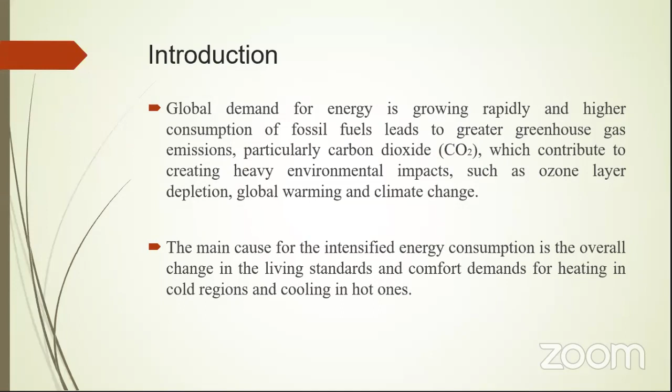The main cause for the intensified energy consumption is the overall change in living standards. That is the main problem. Normally in summer days, or when we are in a hot place, we need some cooling. And when we are in cold regions, we need some heating. That is the reason why we require more energy, why the demand is growing higher - because of living standards, because our body is tuned to a new environment. So that is the problem for heating in cold regions and cooling in hot ones, and this is why the demand is increasing day by day.

If you take how the energy is distributed through different sectors - total energy consumed only from these fossil fuels - how we are distributing to different areas: maximum energy is distributed to industrial sites, transport, and domestic purposes. If we try to incorporate renewable energy sources in industry and transport, almost the maximum amount of greenhouse emission gases will be reduced. This is a small example I'm checking, and this is by 2018.

If you look at coal, it's 38%. We are depending on coal 38% for energy, and natural gas 23%. If you look at renewable energy sources, that will be very, very less - 16 plus 2 plus 5 plus 3, that's it, around 21, 24, 26%.

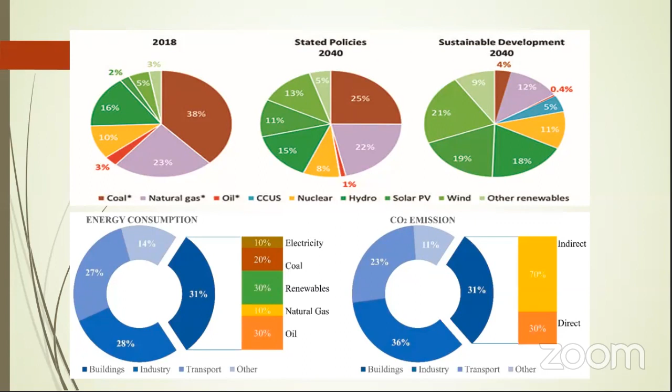For renewable energy sources, we have to reduce the greenhouse emission gases. So what are the things we can do? That is what we are going to discuss today. For that, one thing is we can store

latent heat. So thermal energy storage is a useful tool for improving energy efficiency and increasing energy savings. So how to increase the energy savings and how to improve the energy efficiency, that is the main tool, and that is what we are going to discuss today.

What is thermal energy storage? Here we have 3 different kinds of thermal energy storage. First is chemical heat. This chemical heat works by breaking and forming molecular bonds.

The second one is sensible heat. This is by heating or cooling a material, without any phase changing, just heating and cooling directly. That is sensible heat. And the third one is latent heat thermal energy storage.

That is by different phases: melting, solidifying, those kind of phases. So by melting and solidifying a material. So how are we going to achieve this thermal energy storage?

By using these 3. Now out of these 3, we are going to concentrate only on latent heat thermal energy storage. And why do we need this?

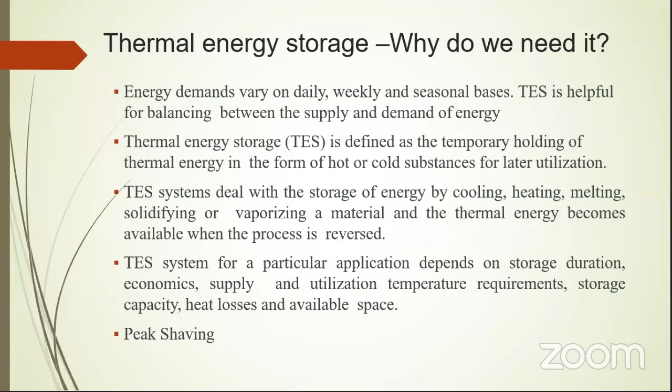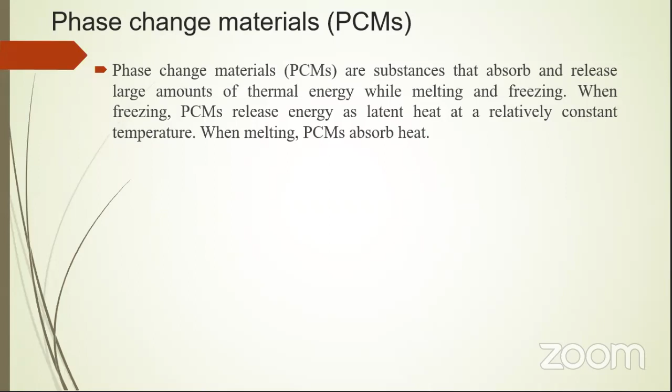That phase change material, when it melts, is in the liquid state, meaning it stores some amount of energy. When the power is not there, it releases the energy to the refrigerator to keep it cool for the next few hours. That means the liquid or gel inside the box, that PCM, will get solid again.

During latent heat absorption or latent heat release, the temperature of PCM remains constant. There is no change in the PCM materials - that is the main advantage. During latent heat absorption or release, whenever it absorbs or releases energy, the entire PCM material for the whole period will be at constant temperature. There is no increase in temperature.

This figure shows latent heat of fusion or latent heat of vaporization. The x-axis is heat supplied, and the y-axis is temperature. When the phase changes from solid to liquid, that is latent heat fusion. The temperature remains constant when it turns from solid to liquid - that horizontal line shows the temperature is constant, with no increase in temperature.

Again, when the phase changes from liquid to gas, that is latent heat vaporization. For that amount, the temperature remains constant as liquid turns to gas. So these two portions maintain constant temperature - these are called latent heat. Solid to liquid means latent heat fusion, and liquid to gas means latent heat vaporization.

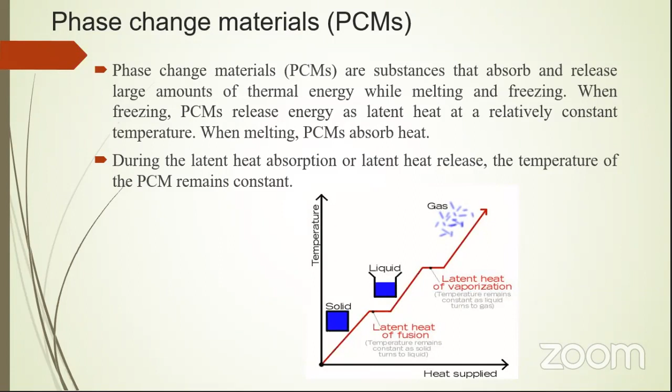Again, when the temperature falls, the core becomes solid again. The PCM solidifies and heat energy is released back to the environment. So initially the energy is stored when the phase changes from solid to liquid, and the energy is released when the phase changes from liquid to solid. This is the concept of phase change materials.

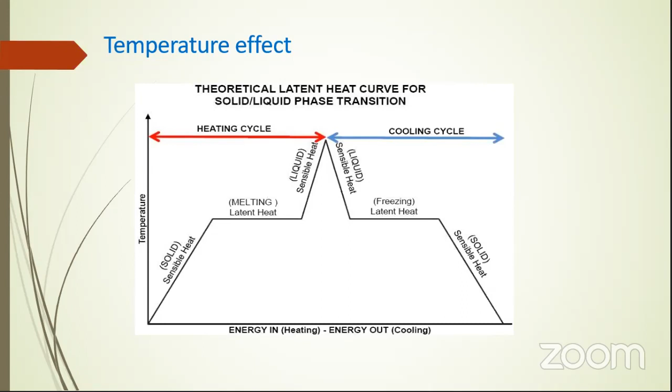Now, how was PCM developed, when was it developed, and why did they develop it? During the 1970s to 80s, NASA space research included considerable research and development of new materials because they could protect delicate instruments in space. That was the main reason they developed PCM - the need arose from the temperature extremes encountered.

In 1987, Triangle R&D demonstrated the feasibility of incorporating PCMs within textile fibers, and that got patented in 1994. They started the process in 1987 and patented it in 1994. The PCM microcapsules within a fiber cover a broad range of fibers, including polyesters, nylon, acrylics, and modacrylics.

In the mid-1980s, work on temperature-adaptable fabrics was undertaken at the US Department of Agriculture, Southern Regional Research Center in New Orleans. So this is the starting of PCM. When it developed, what is the reason, what's the demand? Actually NASA required to safeguard their precision, accurate equipment. For that, they developed this PCM, phase change materials. This is a small example of why we need phase change materials and what the reasons are.

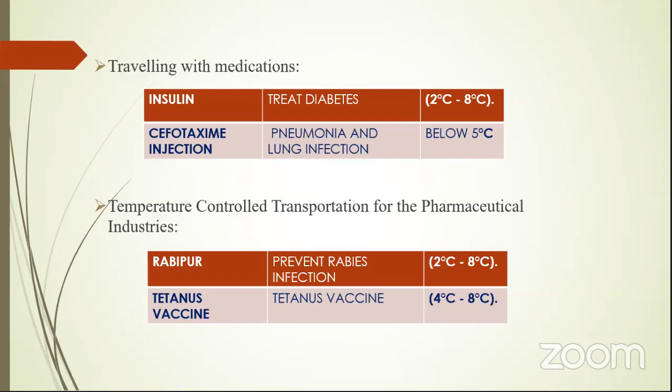These are a few more examples where we use phase change materials. Transportation of blood samples from one place to another requires the proper temperature for the blood, otherwise it will get thicker. We have to keep a constant temperature so the blood remains in the same state; otherwise the phase of the blood changes and then it becomes useless.

Then temperature control for transport in the food and beverage industry, and mini cold storage units for ambulances. Ambulances mostly use phase change materials to keep the ambulance temperature for cold storage, as they have to keep medicines at normal temperature.

And storing of breast milk and feeding infants with utmost care during traveling is also a main important thing - while traveling we have to take care of children too. These are a few places where we use these PCM materials.

What are the properties of PCM materials? On what basis do we select them, and what are the different properties? These properties will change based on the PCM material. Melting point should be in the desired temperature range - that is the main point. So we have to take the melting temperature into account; then only the constant temperature will remain.

High latent heat of fusion per unit volume is needed to store more energy in a given volume - we have to take care of that. High thermal conductivity is also an important property of PCM, determining how much it assists charging and discharging of energy. Also low change in volume during phase change, low vapor pressure to avoid containment problems, and it should be non-flammable, non-toxic, and chemically stable.

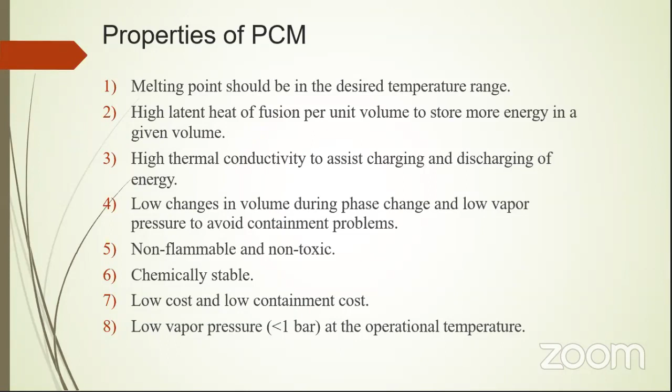Apart from all that, we have to depend on cost, because cost is also a main problem - so low cost, low containment cost, and low vapor pressure at operation. These are the few properties of PCM we have to keep in mind.

We can divide the entire PCM like this: organic, inorganic, and eutectic. Organic includes paraffin compounds and non-paraffin compounds, and inorganic includes salt hydrates and metallics. The eutectic is a phase change combination: organic-organic, inorganic-inorganic, and inorganic-to-organic.

Small examples: inorganic salt hydrates maintain 5 degrees Celsius to 80 degrees Celsius, with high latent heat storage capacity but they fail to recrystallize. Paraffins have high thermal conductivity with small change in volume while melting, and maintain minus 8 degrees Celsius to 40 degrees Celsius; they overcome supercooling and have chemical stability over a number of cycles, but have varying cost and are hazardous to skin.

And bio-PCM is now used in a number of places, maintaining between minus 40 degrees Celsius to 151 degrees Celsius, derived from animal fats and plants.

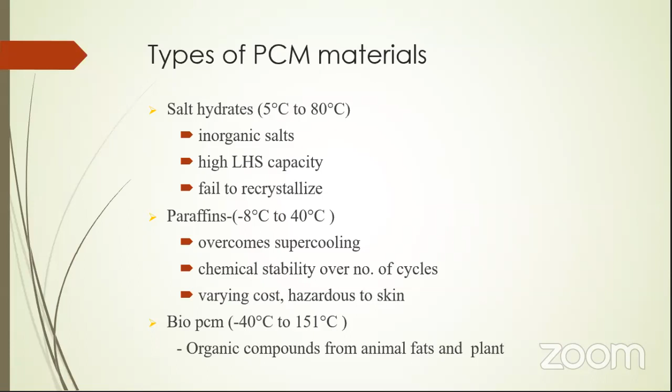And we'll see about organic materials. These possess the ability to absorb and release large quantities of latent heat. That's the main advantage of organic materials. It absorbs and releases large quantity of latent heat during phase change process over a certain temperature, that is at constant temperature. These would be naturally existing petroleum byproducts: naphtha, gasoline, fuel oil, bitumen, and hexane. They have their unique phase change temperature, ranging between minus 70 degrees Celsius to 250 degrees Celsius.

This phase transition: solid to liquid and solid to solid phase transition. In solid to solid phase transition, we have some crystalline changes, one crystalline state to another crystalline state. There will be a small amount of latent heat. When there is a phase change between solid to liquid, that shows large amount of heat with a small volume change, because we have to take care of how much amount of volume changes. If you take larger heat quantity storing with a small volume change, that will be better. If the volume changes too much, again there will be a problem.

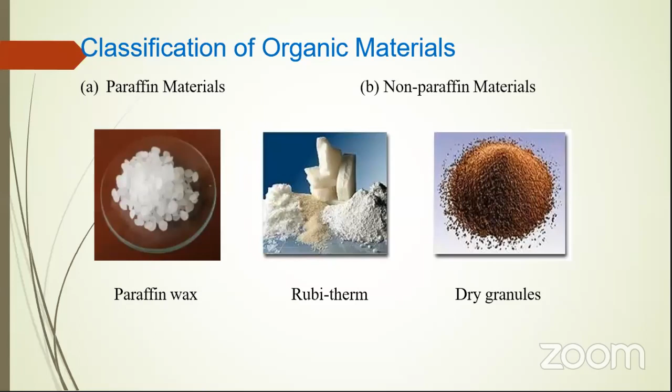These are the classification of organic materials: paraffin materials and non-paraffin materials, and paraffin wax, rubitherm, and dry granules. About paraffin materials, it consists of a mixture of mostly straight chain N alkanes, and the crystallization of the CH3 chain releases a large amount of latent heat. However, under cost consideration, only technical grade paraffin may be used in latent heat storage systems. So only these are the standards we are using: 6106, 5838, 6035, 6499. These are the grades we are using.

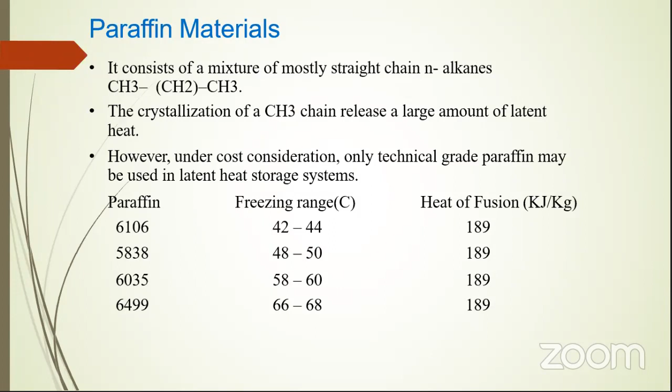These paraffinous PCM materials have phase change temperature below 15 degrees Celsius and are used in cooling cycles. So when we use it in cooling cycle, the temperature is below 15 degrees Celsius. On the other side, the temperature rises to 90 degrees Celsius. So PCM in between 15 degrees Celsius to 90 degrees Celsius is used in heating cycles.

Apart from that, paraffin is very safe and we can rely on it, and it is non-corrosive and less expensive, because cost is the main criteria for selecting the PCM, though other things are also important. So apart from that, cost also we have to take care of. If you compare, paraffin gives all the properties at less cost, so almost we are dependent on paraffin for PCM materials in a number of applications. It has low thermal conductivity, is not compatible with plastic containers, and is flammable. These three effects can be partially eliminated by modifying the wax and storage systems, so we can eliminate these undesirable properties. By eliminating these three properties, paraffin is an entirely good PCM material.

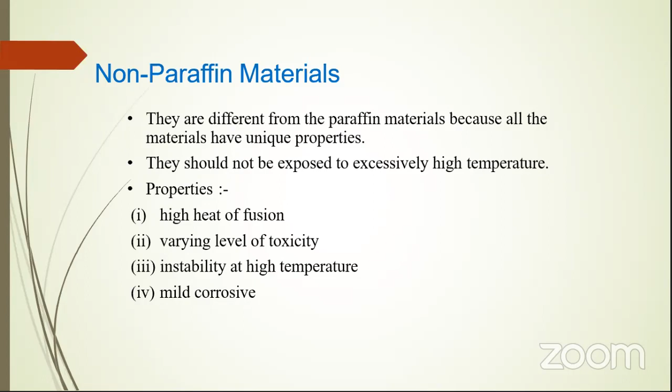On non-paraffin materials, each and every non-paraffin material has unique properties, and they should not be exposed to excessively high temperatures. These are the few properties of non-paraffin materials: high heat of fusion, varying level of toxicity, instability at high temperature, and mild corrosiveness.

Then eutectics, which we have studied in a phase change iron carbon diagram. These are combinations of two or more compounds with a minimum melting temperature. This eutectic almost melts and freezes without phase separation, so that is the problem here - without phase separation, it almost melts and freezes. These eutectics tend to be a solution of salts in water that have a phase change below 0 degrees Celsius.

On what basis do we select? Already we discussed what are the properties, and these are the things we have to take care of while selecting PCM materials. So again a number of things are repeating: melting temperature, heat capacities, thermal stability, mechanical stability, cyclic property degradation, heat transfer characteristics, cost, corrosiveness, ozone depletion potential, fire hazard, ease of encapsulation. That is the main one - ease of encapsulation. That also we have to take care of while selecting the PCM materials, based on what application we are using, where, which place, what location we are using. These things we have to take care of.

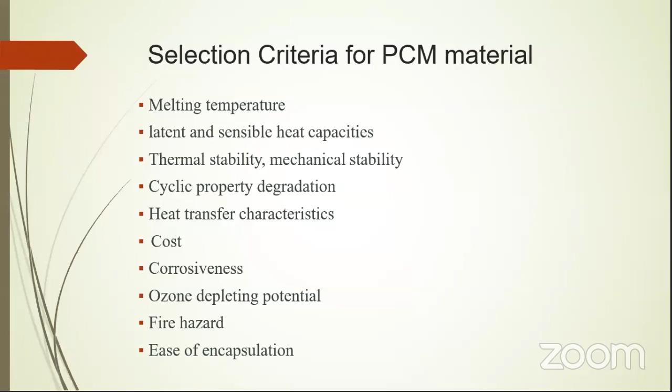And solar water heater, as you know, and cold storage and sportswear. Cold storage like normal flasks, how that's maintaining the temperature - for that we are using PCM materials. So that we are going to discuss today.

And sportswear, why we are doing sportswear means that has to manage the temperature, right? Whatever heat generated from the body and the heat released to the environment, that should be balanced, otherwise too much tiredness will get. The thermal stress will be reduced by using this PCM sportswear. That is the main reason why they are wearing like this, to balance the heat generated by the body and the environment.

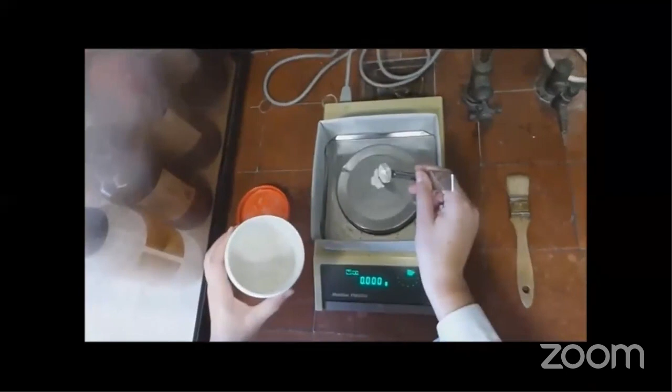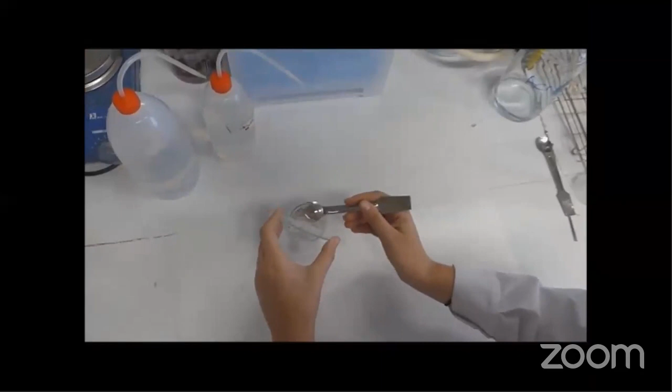And here we are going to take 2 different materials: sodium alginate solution - it'll take only 2 minutes, not more than that - and calcium chloride. This is the sodium alginate. That means how they are making phase change materials by adding 2 different materials. Because this also you should know, right?

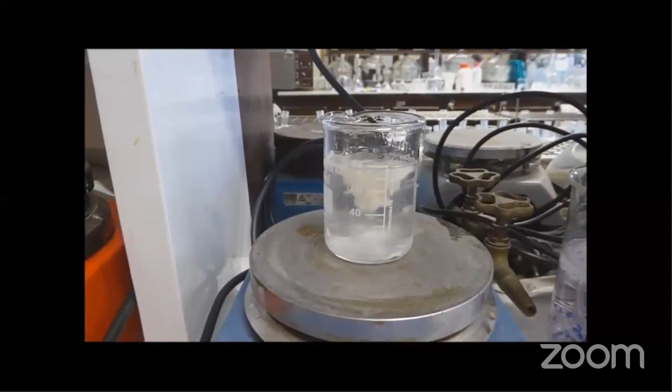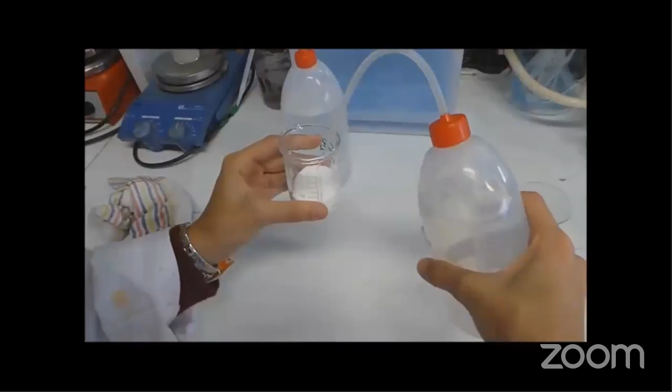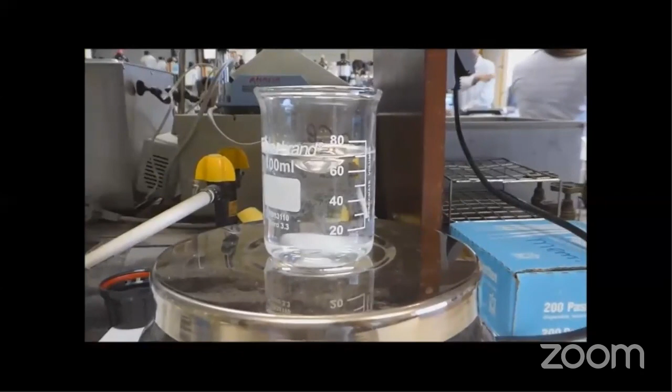And calcium chloride solution - so these are the 2 different solutions we have, sodium alginate and calcium chloride. By mixing these 2, the output, the final solution will be calcium alginate. So this calcium alginate will be mainly for wound dressing. So when we get some wounds for dressing, those places we are using this calcium alginate. Apart from this, this particular solution is used for entrapment of enzymes and forming artificial seeds in plant tissue culture.

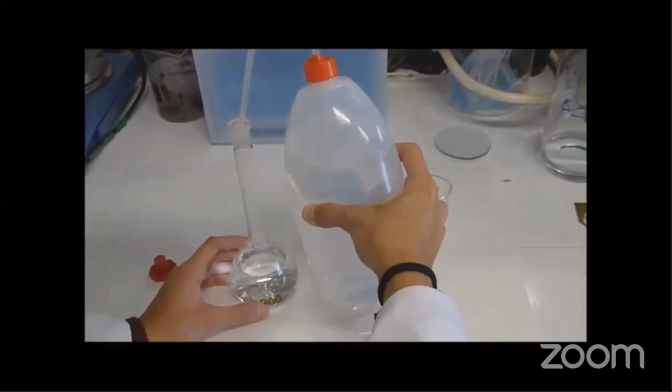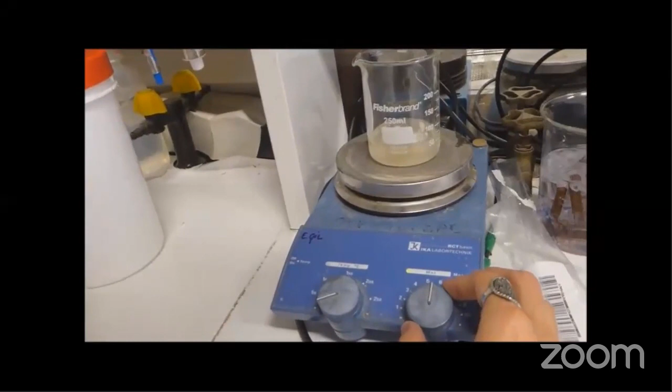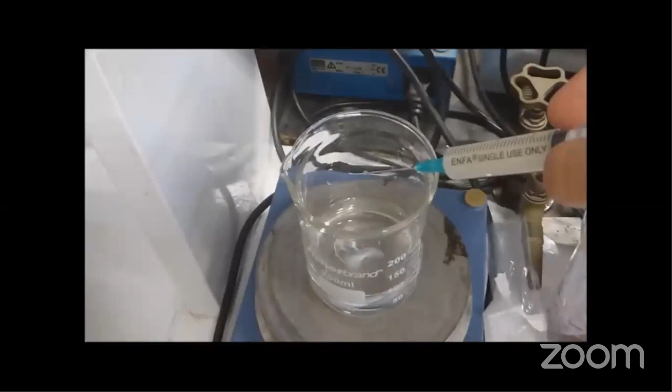So how they are preparing microcapsules? Because as a PCM material, we have to make some capsules or balls like things. Then only we can put those capsules or balls in the PCM material application, wherever it is, either flask or whatever. Here we can have 2 categories: whether we can keep sodium alginate constant and add calcium chloride, or in the calcium chloride we can add sodium alginate in smaller amounts. It will be small - if you look at the video, small balls are making by adding these things.

How we are making phase change materials.

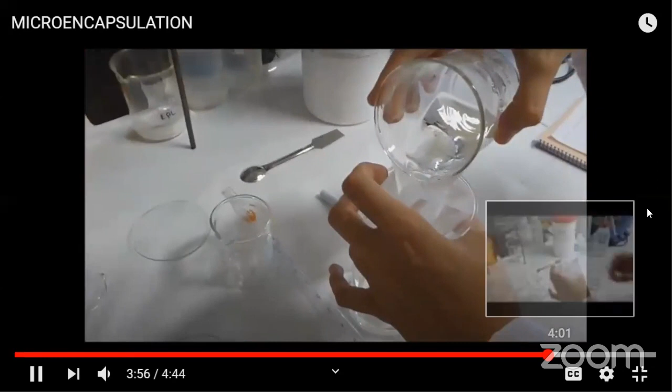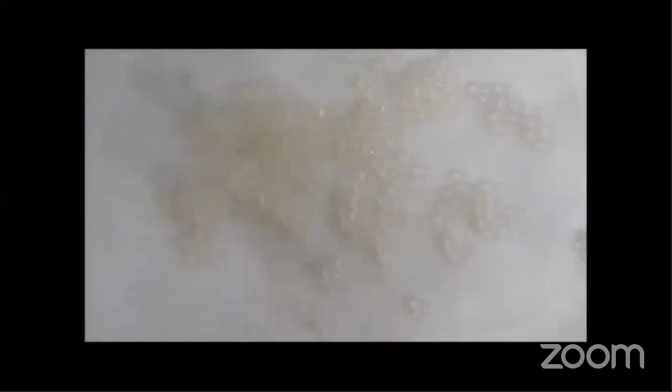So finally, we have got phase change materials in the form of balls, small amount. So these are the phase change materials. This phase change material we can use for any kind of applications where we need some constant temperature - energy store and energy release process.

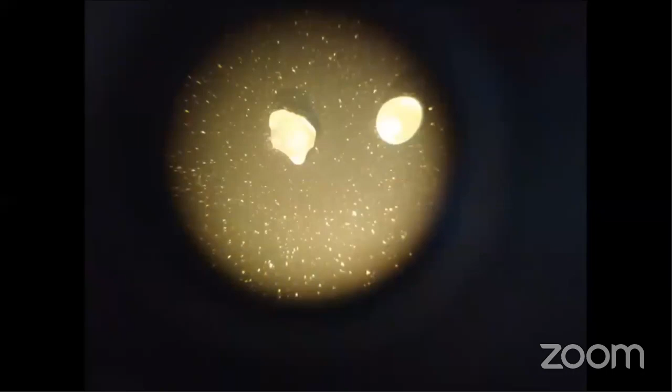So I'll stop this. So this is the video how we are making it. So this is the PCM encapsulation morphology, how we can make the PCM.

And this is, we can keep calcium chloride stationary and move sodium alginate, or we can keep sodium alginate stationary and move calcium chloride. So there is a small change - high irregular gel shape, less irregular gel shape. Anyway, we'll get only calcium alginate gel, that is the final result. There will be some irregular shape based on these two different phases, process.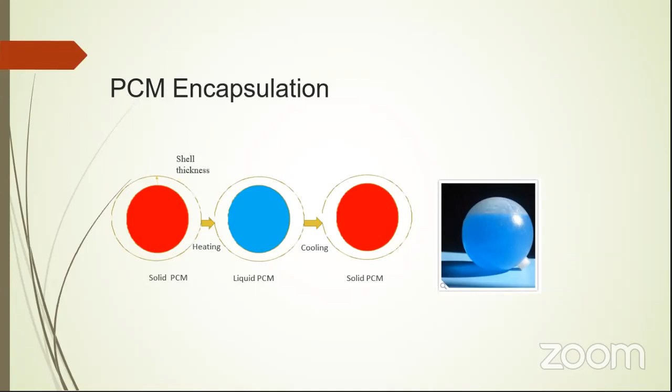And this is how we are making the PCM encapsulation - solid, when heating it makes to liquid, when cooling it again makes to solid. This is a small example how we can make PCM for storage device. So phase change at constant temperature, and we have to absorb and emit heat while maintaining nearly constant temperature. So here I am taking SAVE OM03 as a PCM material, and insulation material is polyurethane. And flask body, flask I'm going to make made of polylactic acid.

And this is the technical specification of that material. This is the insulation foam, and this is the polyurethane in the form of powders.

And this is the flask we made, consisting of 3 parts: body, removable seal, and the cap. The body is a 3-walled concentric cylinder.

On the bottom we have insulation, PCM, and low temperature product. These are 3 layers: the innermost hollow cylinder is for the low temperature product, the middle cylinder is for PCM, and the outermost cylinder is for insulation.

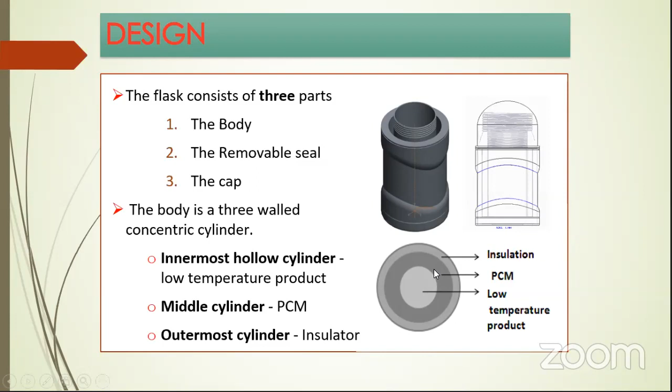So how are we going to place the PCM, and what type of PCM are we going to place. There is the design, and these are the standards we are taking from Yoram Kozak, and we assume these things.

The process is quasi-static, meaning quasi-steady. That means this is one kind of thermodynamic process that happens slowly enough for the system to remain in internal equilibrium. That is the main thing, so that should be in equilibrium.

That is quasi-steady state: the solid PCM temperature remains at the melting temperature, and the material properties, heat transfer coefficients to the ambient, and the ambient temperature are constant. These are some assumptions we took while making the model of that flask.

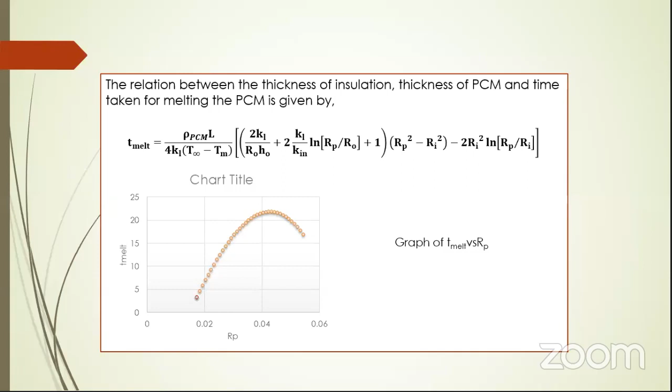This is the relation between the thickness of insulation and the thickness of PCM. What's the thickness of insulation, what's the thickness of PCM material we placed, and how much time is taken for melting the PCM. So we made these 3 relations using this graph.

And this way we insulated it. Polyurethane insulation is filled in the outer layer. This is the outer layer, so here we filled it with the polyurethane.

And these are the polystyrene tubes we initially took to check, because we have to keep this. So initially we took polystyrene tubes, and this PCM freezes after 48 hours into solid form, whereas immediately that will be broken due to material compatibility issues.

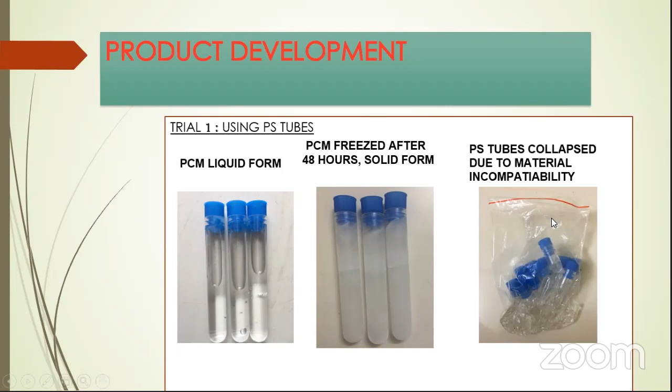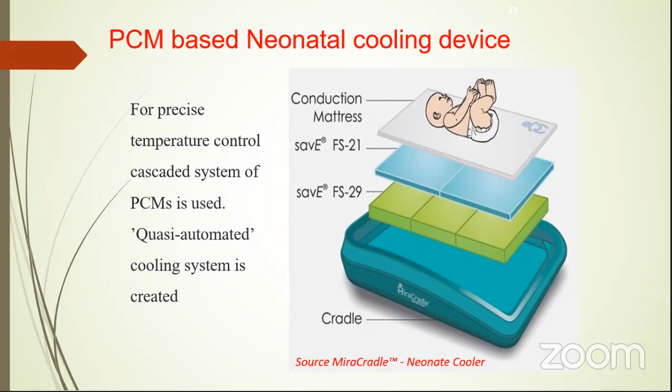So here we have a number of layers to make the baby's body cool, because on the top floor we have a conduction mattress, where we place our babies. The temperature must be maintained at a constant level, otherwise the babies will face some sore issues.

This passive heating and cooling uses substances usually made of a salt hydrate, fatty acid, ester or paraffin, such as PCM materials. These phase change materials are solid at room temperature normally, but when they contact warmer objects, they liquefy and absorb and store heat.

When the temperature increases, the phase changes from solid to liquid and it absorbs and stores energy. Liquid PCMs can then solidify and give off heat. Once stored in a refrigerator for 6 to 8 hours, it can be used for up to 72 hours without power. That's why we use these phase change materials for transportation of life-saving medications, to maintain constant temperature. By using proper refrigeration with PCM materials, we can maintain normal temperature for 72 hours without any power, including in baby's beds.

So this is the 4 layers we have. At the bottom we have the insulated cradle to keep all these layers. This is a plastic structure framework for placing all the other components, and it provides insulation to the PCM. Insulation means we have to insulate the outer cover, outer surface of the PCM materials.

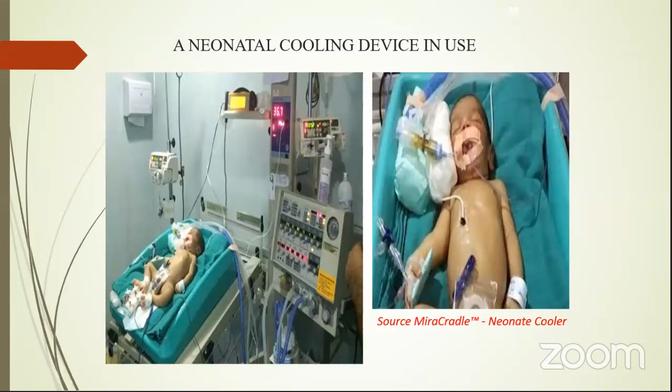This is the neonatal cooling device, which is in use in a number of hospitals. They use this neonatal cooler because for this kind of bed we have to keep babies for a number of days or hours, so we need proper PCM materials.

This is the advantage of this neonatal device using these different materials. The cost is almost 1/10 of existing equipment, because the PCM materials, if used properly, maintain the temperature for 72 hours, so the cost of the entire system gets reduced. Another advantage is that all the PCMs are reusable and there is no maintenance cost - that's the main thing. The same PCMs can be reused, with no need for maintenance, and it does not require any electricity when in use, keeping the temperature right for the next few days.

So we need no electricity and no intimidating wires and circuits for the nurses and doctors. Since the baby lies safely on this kind of PCM bed, there's no need to worry about anything else - no intimidating wires or circuits required for the nurses or doctors who keep the baby safe.

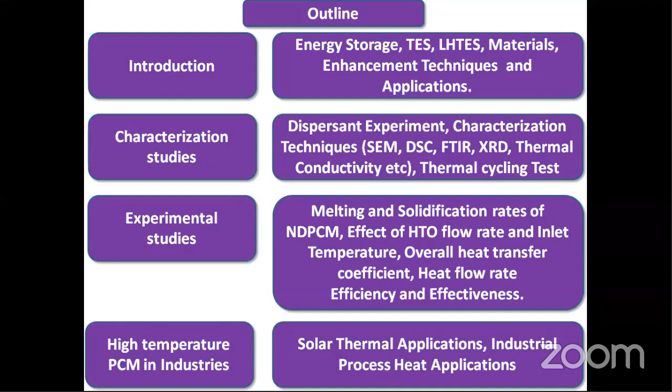The need for energy storage. Energy is important for social, economic, industrial, and technological development of our country. Increasing energy demand and decreasing conventional energy sources push the world to exploit new and renewable energy sources and to store energy in every possible means.

To bridge the large gap between energy supply and energy demand, the concept of effective energy storage has gained momentum in recent years. Electricity produced in 2018 to 19 is about 900 to 1000 terawatt hours, with more renewable energy and less fossil fuel. Concentration of CO2 increases massively due to industrialization. Increased ratio of renewable generation demands energy storage due to its high intermittent nature.

Energy storage is an extensive subject of interest to industrial professionals, scientists, engineers, and technologists. Its significance is to meet flexible requirements, fulfill energy demand, reduce alternate power sources, produce safe energy with less carbon footprint, and increase the overall performance of the system.

Energy storage has four major classifications: mechanical energy storage, electrical energy storage, chemical energy storage, and thermal energy storage.

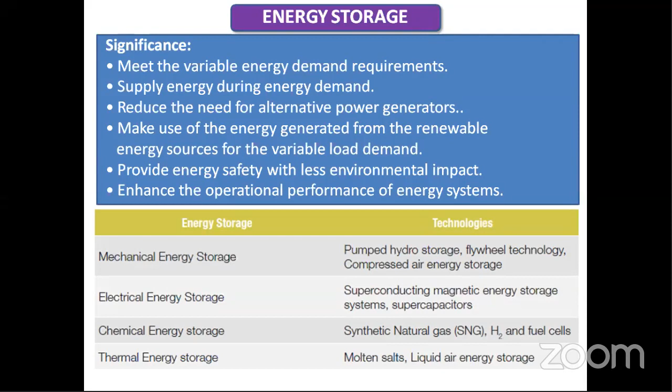Now the heat transfer mechanism in thermal energy storage systems. A thermal energy storage system can store heat or cold to be used later under varying conditions such as temperature, place, or power. Its main use is to overcome the mismatch between energy generation and energy use. It involves three steps: charge, storage, and discharge, giving a complete storage cycle.

The classification of thermal energy storage systems. Let us discuss the types of thermal energy storage systems. Basically, thermal energy storage systems can be divided into three parts.

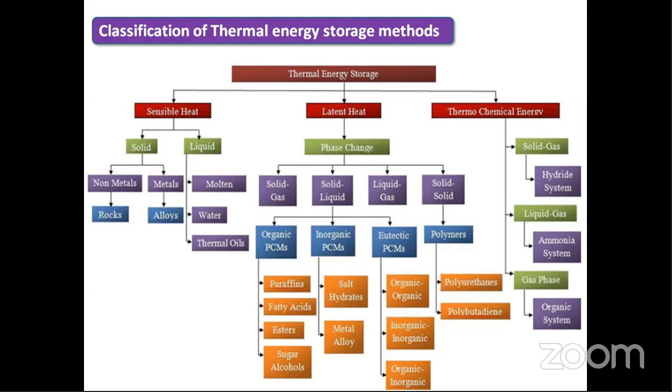One is sensible heat storage, under which solid and liquid materials can work. Then latent heat storage, which may be a combination of solid-gas, solid-liquid, liquid-gas, or solid-solid. Solid-liquid is further classified into organic PCM, inorganic PCM, and eutectic PCM. The third type is thermochemical energy storage, which may be solid-gas, liquid-gas, or gas phase. This is the overall classification of thermal energy storage systems.

Here are some examples of thermal energy storage methods. Sensible heat can be stored by a hot water tank or underground thermal energy storage tank. Thermal energy can be stored as latent heat by means of micro encapsulation or macro encapsulation of phase-change material, or using latent heat thermal energy storage materials.

Thermal energy can also be stored thermochemically, by means of adsorption or absorption, or using thermochemical materials.

Now, what do you mean by sensible heat storage? In sensible heat storage, thermal energy is stored based on the specific heat of the material. Whatever material we choose should have higher specific heat capacity; that is the prime requirement. Here, the temperature of the material varies and does not undergo any phase transformation during charging and discharging cycles.

The amount of energy stored is given by Q equals the integral from T1 to T2 of mCp dT, which finally gives mCavg(T2 minus T1). T1 is the initial temperature and T2 is the final temperature of the storage medium. Cavg is the average specific heat between T1 and T2. The heat and energy storage in sensible heat storage depends upon the amount of storage material, the specific heat of the medium, and the difference between the initial and final temperature.

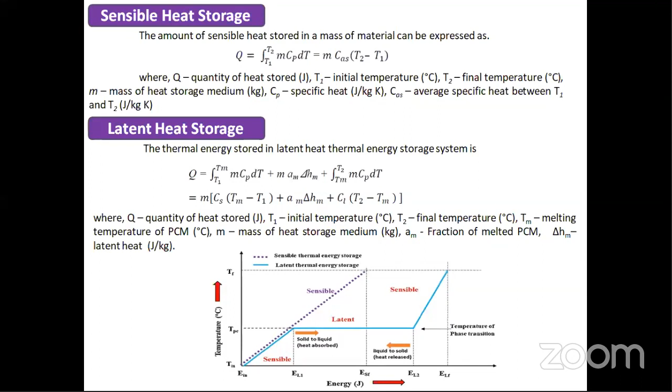Next, we will discuss thermochemical energy storage. Energy can be stored in a chemical reaction which can occur in both forward and reverse directions. In an endothermic reaction, energy is used to form a product. The energy stored in the product can be regained by an exothermic reaction under specific conditions.

Thermochemical energy storage can be roughly presented as the following sequence: heat plus chemical compound CD gives C plus D. This is an endothermic process, the charging process. The reactants can then store this thermal energy for a long duration.

Next is the discharging process. It is an exothermic process: C plus D equals CD plus some energy discharged. This is the fundamental of thermochemical energy storage.

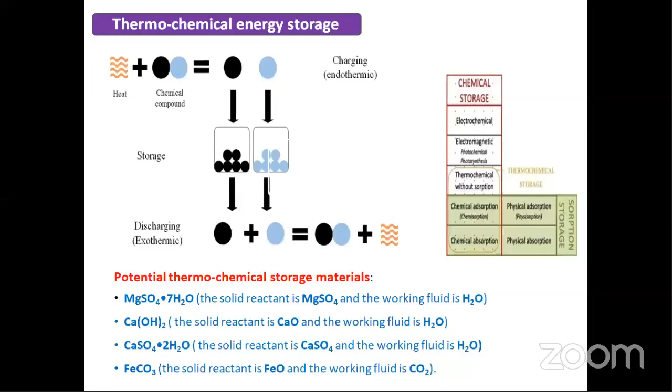Next, we will discuss sensible heat storage materials. A sensible heat storage material should have higher thermal capacity, high melting point, high thermal conductivity, and high stability—chemical, physical and thermal stability—and it should be of low cost.

Commonly used sensible heat storage materials are concrete, cast iron, and bricks, used for a temperature range of 400 to 1200 degrees Celsius. The advantages of solid storage materials are low cost and no boiling point.

Next, liquid storage media. Among liquid sensible heat storage media, water is the best and most commonly used storage medium at a low temperature range of 25 to 90 degrees Celsius. Other substitutes for water are petroleum based oils, liquid sodium, and molten salts, etc.

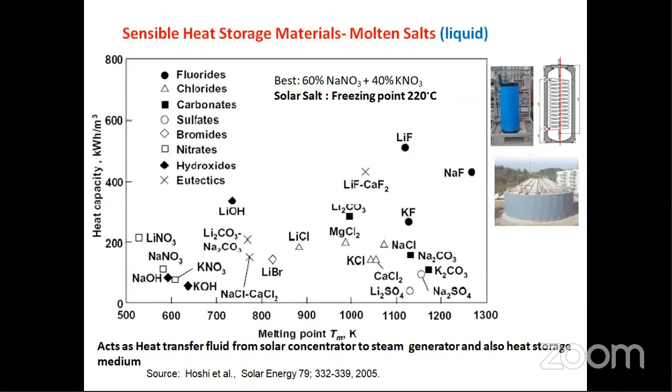Heat transfer mechanism in latent heat thermal energy storage systems: during the charging process, when the PCM at solid state is heated, its temperature increases until it reaches the phase change point. Over this temperature range, heat is stored in sensible form. Further heating incurs a solid to liquid phase transition, and heat is stored in latent form while maintaining constant temperature during this period. Once the phase change process is completed, the PCM is in liquid phase.

This process can be reversed to release heat, which is also called the discharging process or solidification process.

The schematic summary of the properties of PCM: first, thermal physical properties. The melting and solidification temperature of the PCM should be in the range of the desired operating temperature condition. The latent heat of fusion should be higher with respect to unit volume compared with the sensible heat. Specific heat and thermal conductivity in solid and liquid phase must be higher for enhancing heat transfer.

Then kinetic properties: relatively low or nil supercooling exhibited by the PCM. Then chemical properties: chemical and thermal stability to withstand heat at elevated temperatures, non-toxic, non-flammable, and non-explosive.

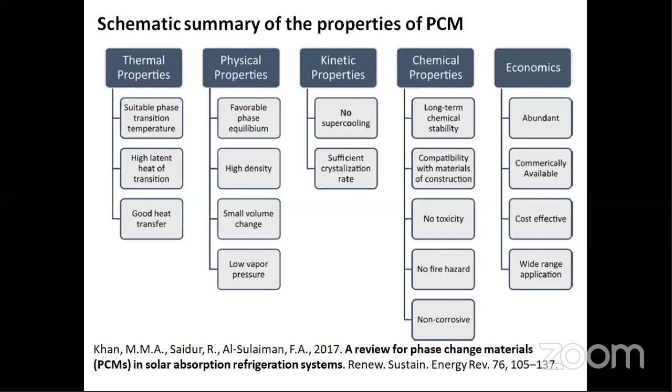Then organic materials. The latent heat storage material can be divided into three parts: organic material, inorganic material, and eutectic materials. Organic materials are divided into two parts: one is paraffin, meaning wax-based PCM, and the other is non-paraffin PCM.

So what is organic? A phase change material which contains carbon atoms is known as organic PCM. Organic PCMs are available for a wide range of temperatures and are stable up to 300 degrees Celsius. Examples include paraffin wax, polyglycol, erythritol, etc.

What are the advantages of using this type of material? These materials freeze without much supercooling or subcooling, have the ability to incorporate directly, show low vapor pressure in the phase change process, good thermal performance, ability to melt congruently, self-nucleating properties, availability in a large temperature range, no segregation, chemical stability, and high heat of fusion.

But of course they have some disadvantages also: low thermal conductivity in the solid state, some are insoluble in water, low phase change enthalpy, low density, require large surface area, high heat transfer rate required during the freezing cycle, low volumetric latent heat storage capacity, more expensive, high volumetric expansion, and low heat capacity. These are the disadvantages of organic PCMs.

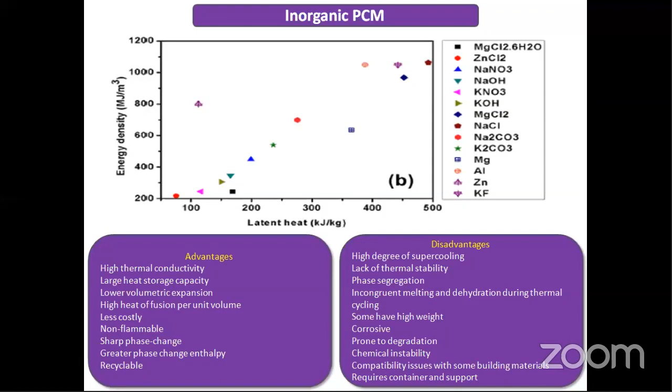High degree of supercooling, lack of thermal stability, phase segregation, incongruent melting and dehydration during thermal cycling. Some have high weight, corrosive, chemical instability, and require container and support.

Next, we will discuss the eutectic PCM. Eutectic PCM is a mixture of two or more components at a particular percentage of composition. The components can be any combination, like organic-organic, inorganic-inorganic, or inorganic-organic.

This type of PCM melts and freezes concurrently without any segregation. Similarly, during melting, different compounds melt simultaneously, which also gives less probability of compound separation.

The material has certain advantages: sharp melting temperature, high volumetric thermal storage density, no phase segregation, and concurrent phase change. Of course, it also has some disadvantages: lack of current availability test data, thermophysical properties, low total heat capacity. Some eutectics suffer from supercooling effect, strong odor, and are costly.

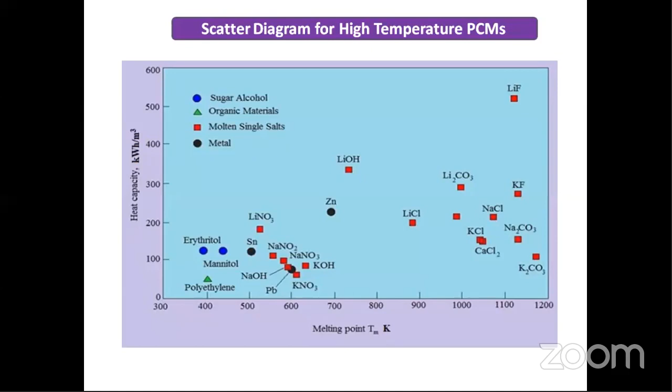The melting point and enthalpy of PCMs. The suitable PCM can be found for a wide range of operating temperature.

Then comparison of sensible, latent, and chemical thermal energy storage. Among these different types of thermal energy storage, latent heat storage has the most flexible operating temperature range, followed by considerably lower operating temperature ranges for sensible and thermochemical storage.

The advantage of using latent heat over sensible heat storage technology is that it has 10 times higher thermal energy storage density, a capacity of 50 to 150, and a round trip efficiency of 75 to 96%.

In latent heat storage, normally, PCM has less thermal conductivity and less heat enthalpy. In order to enhance the performance of the latent heat thermal energy storage, the following techniques are used.

First, adding nano and metal additives to the base PCM, which will enhance the thermal conductivity and heat transfer rate of the PCM. The next method is encapsulation, then using soaked material and shape stabilization of PCM.

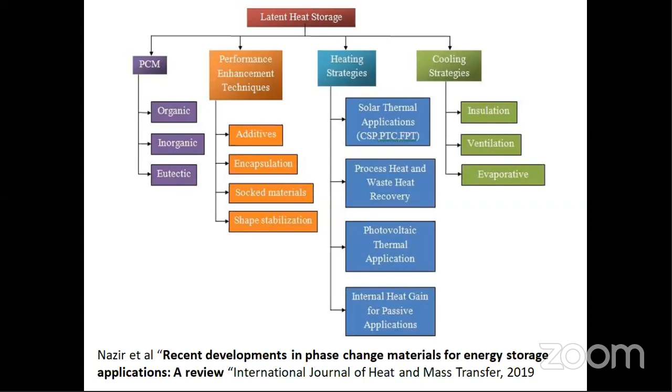Then characterization and thermophysical property of NDPCM. The preparation of a novel class of nanoparticle dispersed PCM by dispersing graphene nanoparticles with three different mass fractions in erythritol PCM is presented.

The thermophysical properties and characterization of the novel PCM were analyzed, and enhancement in heat transfer properties of NDPCM is reported, and the results are summarized in the next slides.

The PCM with higher thermal conductivity, erythritol, is selected for the listed PCM. Erythritol is most used in food industries. It has a high density of 1480 kilogram per meter cube, and it allows a large quantity of erythritol to be packed into a small volume.

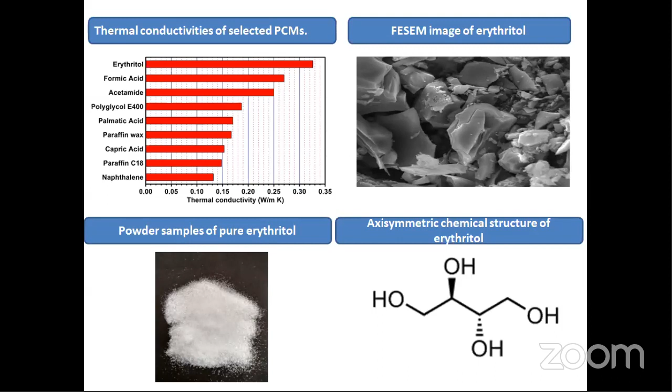Because of its high melting point, it can be used in absorption chillers, steam generators, industrial waste heat recovery, and solar cookers.

The nanoparticle should have the highest possible thermal conductivity. Carbon-based nanoparticles can be directly used to enhance the thermal conductivity and stability of PCM. Graphene is a two-dimensional honeycomb structure, one atom thick, emerging as suitable for latent heat thermal energy storage systems because of high thermal conductivity, high surface area, and maximum chemical stability.

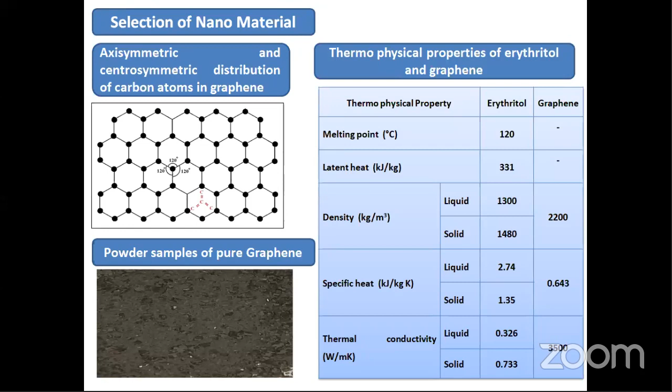The distribution of carbon atoms in graphene nanoparticles is both centrosymmetric and axisymmetric. These are some thermophysical properties of erythritol and graphene.

Then the dispersion experiment. Graphene dispersed erythritol PCM was prepared by a two-step method. The erythritol was melted at approximately 120 degrees Celsius by hot plate and then poured into the beaker. The beaker was kept on an ultrasonic vibrator for 2 hours. A certain amount of GNP, that is graphene nanoparticle, at 0.1%, 0.5%, and 1% was added to the molten PCM. The ultrasonic temperature was about 140 degrees Celsius to ensure the samples kept sufficiently above the melting temperature of the erythritol.

These are the prepared samples.

The characterization techniques for PCM can be classified into two types: thermal characterization and chemical characterization. The thermal characterization includes study of phase change temperature, latent heat, thermal conductivity, and thermal stability. Chemical characterization studies include finding the size, shape, and crystalline structure.

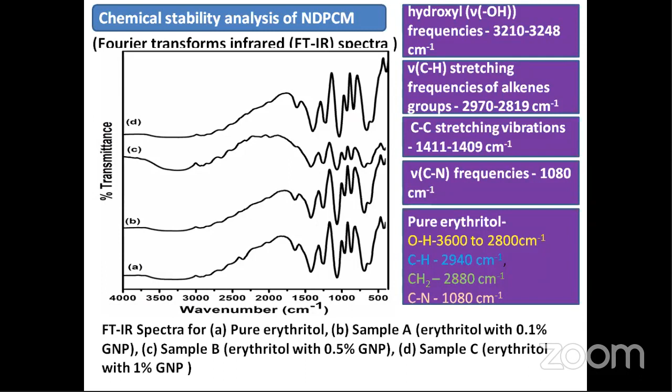Then the thermal characterization techniques. Differential scanning calorimetry (DSC) was used to determine the latent heat and phase change temperature of melting and freezing of PCM and NDPCM. Here the DSC diagram was already taken.

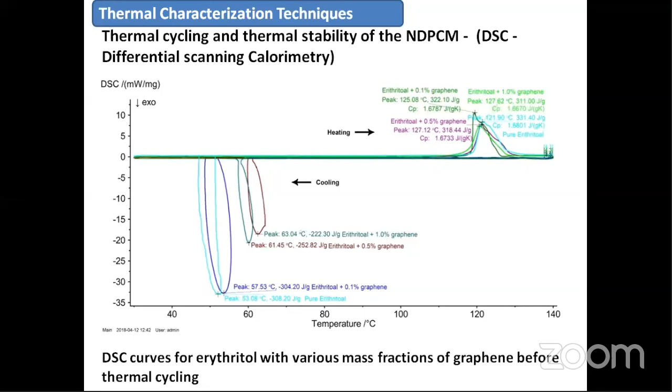Then thermal characterization techniques: the thermal stability test or thermal cycling test. The thermal cycle test is used to know the long-term stability of the storage material. The thermal cycling system was designed to operate between 30 degrees Celsius and 140 degrees Celsius. Totally 1000 cycles were taken, and each cycle contained one melting and one freezing process. These are the physical states of the PCM and NDPCM samples during the melting and solidification process, shown in the figure.

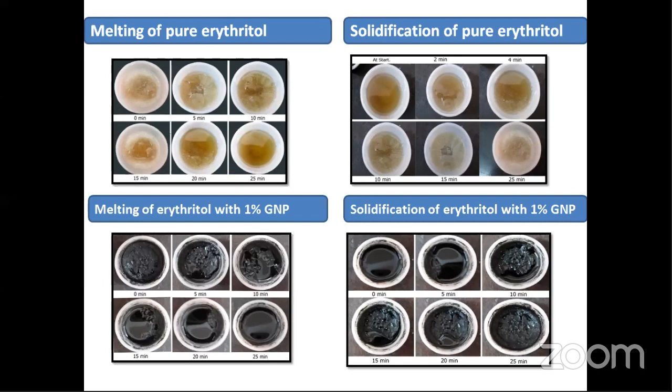The thermal conductivity LFA method: we are using the LFA method in our research. Thermal conductivity of PCM and NDPCM can be calculated by the LFA method. The thermal conductivity of erythritol was enhanced with the increase in weight fraction of GNP due to its high thermal conductivity. Thermal conductivity of erythritol is 0.733 watt per meter Kelvin. Due to the addition of 1% GNP or graphene with the erythritol, there was a 53% increase in the thermal conductivity.

Then experimental investigation. A detailed experimental investigation was conducted to analyze the effect of various inlet temperatures and mass flow rates of Therminol as a heat transfer oil on the rate of melting and solidification of base PCM erythritol and NDPCM in a horizontal shell and helical tube latent heat thermal energy storage system, and the results are compared in the next slides.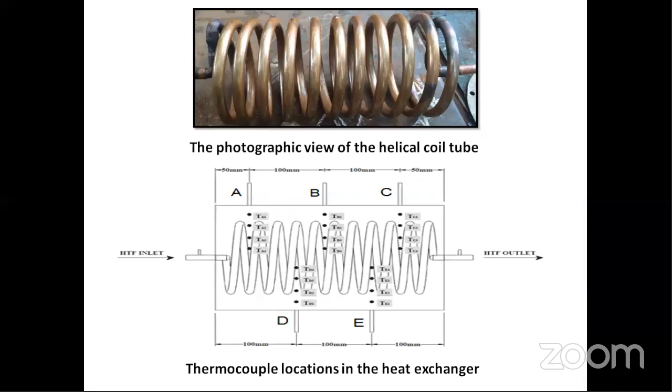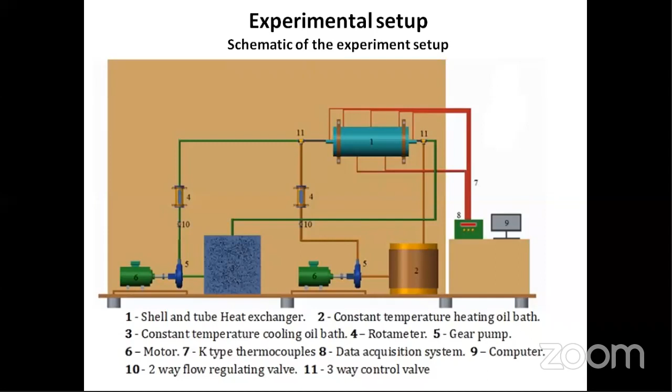As a schematic of the experimental setup used for charging and discharging experiments, 88.5 kilogram of heat storage material was loaded in the heat storage system. One thermal cycle consists of one complete melting and one solidification for PCM and NDPCM. The melting time of NDPCM was reduced by 22% as compared with erythritol. The solidification time of NDPCM was decreased by 23% as compared with pure erythritol.

Effect of heat transfer oil inlet temperature: the melting time was reduced by 19% for pure PCM and about 21% for NDPCM when the heat transfer oil inlet temperature was increased from 160 to 180 degrees Celsius. The solidification time was reduced by 10% for PCM and 14% for NDPCM when the heat transfer oil temperature was decreased from 45 to 30 degrees Celsius.

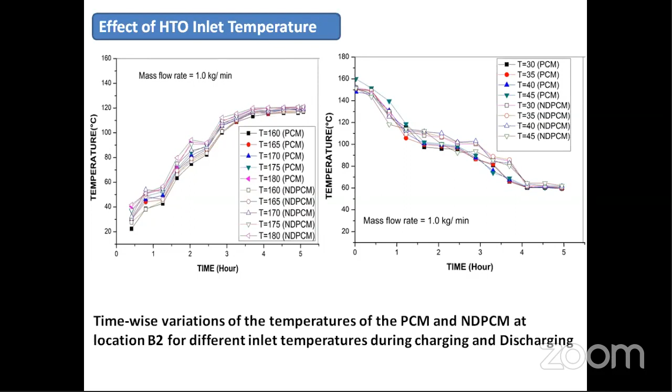Next, the effect of heat transfer oil flow rate. Melting time decreased by 20% for PCM and 30% for NDPCM when the flow rate increased from 0.5 kg per minute to 2 kg per minute. The solidification time reduced by 19% for PCM and 20% for NDPCM when the flow rate increased from 0.5 to 2 kg per minute.

Then performance investigation was done. The overall heat transfer coefficient during melting process increased by 7%, and during solidification process increased by 6%.

Heat flow rate: at the beginning of the melting process, heat flow from heat transfer oil to phase change material increased by 3%, and for heat transfer oil to nano dispersed phase change material it increased by 4%, for a 5 degree increase in inlet temperature. At the beginning of the solidification process, heat flow from phase change material to heat transfer oil increased by 4%, and from nano dispersed PCM to heat transfer oil by 7%.

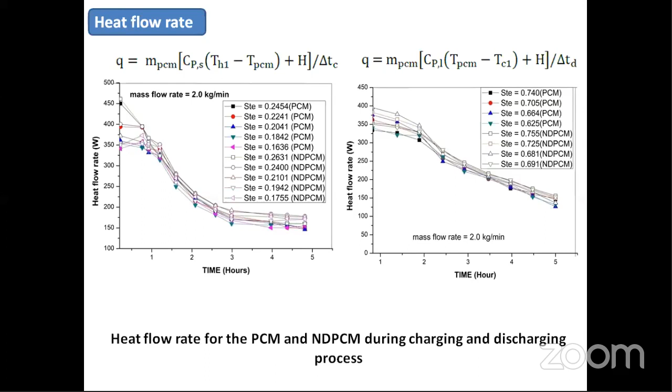Then efficiency: the charging efficiency of the system increased by 32.89% for PCM and 42.87% for NDPCM. The discharging efficiency of the system was 38.25% for PCM and 55.08% for NDPCM. The phase change efficiency of NDPCM is higher than PCM, which is due to the dispersion of graphene nanoparticles in the erythritol.

Next we discuss effectiveness in the latent heat thermal energy storage system. The effectiveness decreases with increase in mass flow rate of the HTO. The increase of mass flow rate causes a reduction of HTO temperature difference between inlet and outlet, hence the effectiveness decreases. In the melting process, the effectiveness of NDPCM was 14% greater than PCM. In the solidification process, the effectiveness of NDPCM was 12% greater than the base PCM.

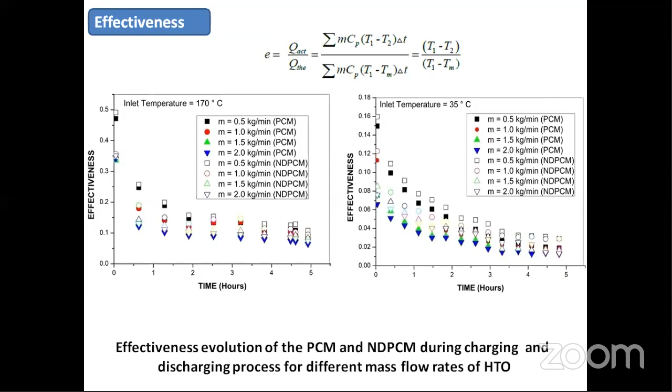Now we'll move to the second part of our presentation: high temperature PCM in industrial applications.

Percentage of heat demand in the industrial sector: reports show that 30% of industrial heat demand is below 150 degrees Celsius, 22% is in medium temperature (150 to 400 degrees Celsius), and 48% is in high temperature applications. The International Energy Agency Solar Heating and Cooling program fixed the industrial heat demand at medium temperature (100 to 400 degrees Celsius) at 19% of total heat demand.

This demand can be addressed through utilization of waste heat recovery from industries. It is essential to store the excess energy, which can then be recovered and reused when required.

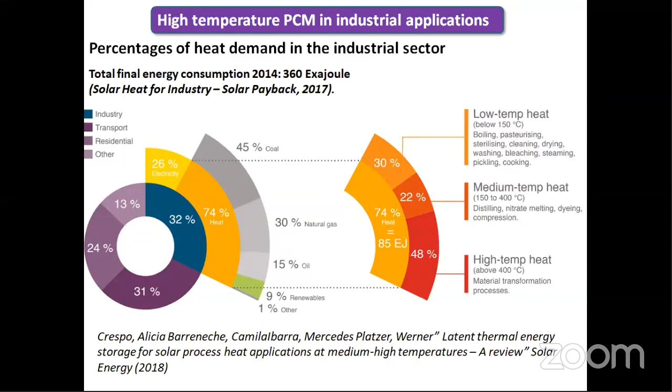The mixture of different salts allows reduction in melting point, for example fluorides and their mixtures. The melting point of sodium nitrate can be decreased by mixing it with other salts like sodium hydroxide, but the latent heat of fusion of the mixture increases.

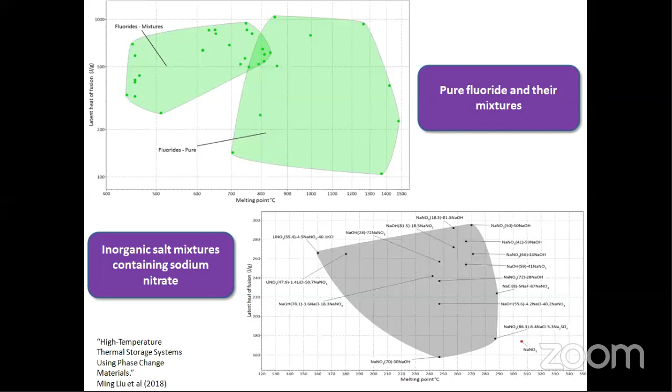Sir, the video is not coming, sir. Why, sir? The video isn't showing, it's just an empty black screen. Okay sir, I will show it. Okay.

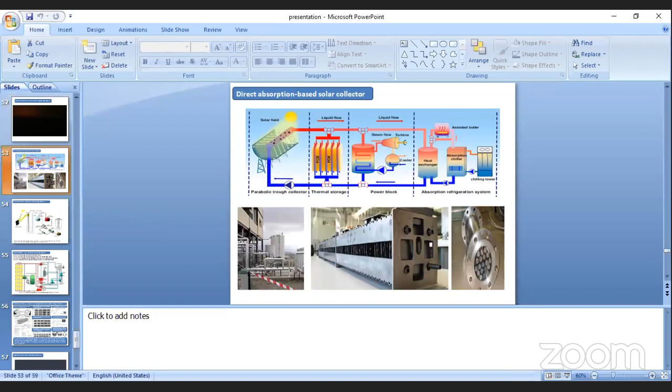Sir, next screen is over. Yes, visible, sir. Direct absorption based solar collectors.

Working with a high temperature heat storage material, this system with a parabolic trough collector provides intensive heat for many industrial processes such as electric power plants and absorption refrigeration systems. The charged nanofluid can transfer heat to the PCM to ensure stable heat supply.

Here, this system having a parabolic trough collector is a heat source. It is then combined with the power plant, solar power plant, and absorption refrigeration systems. In between, we are providing some thermal storage system to maintain the thermal stability of the overall system.

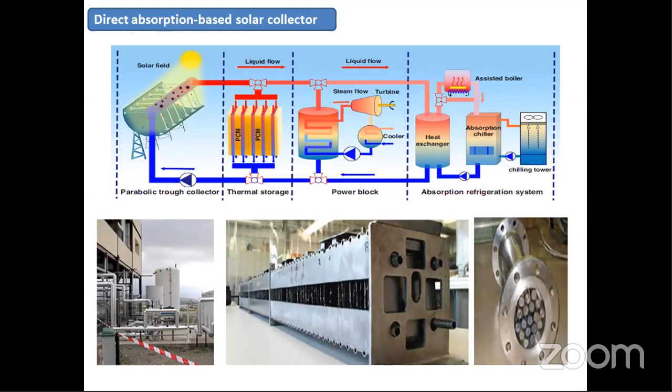Next is the indirect active single tank thermal storage system. Hot and cold fluids are stored in a single tank. Hot and cold zones are separated because of the stratification effect. Controlled charging and discharging are necessary to maintain the stratification.